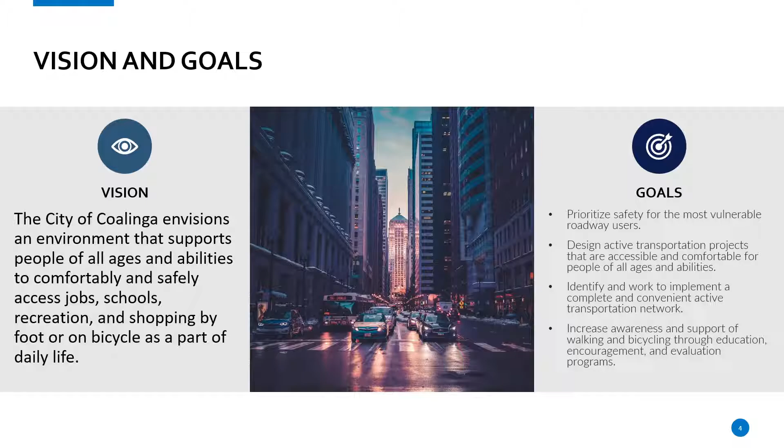In terms of prioritization criteria, this is where we start when developing grant applications and different projects to look at throughout the city. First, connectivity, a huge factor in a lot of our applications, in terms of connecting those areas where we have no sidewalk. That's what we're doing on this big active transportation project currently under construction around the schools and surrounding neighborhoods, where you're seeing a lot of installation of curb ramps and sidewalks.

Also safety, that's another big one. That's where you saw a lot of bulb-outs and other safety improvements we're doing along these corridors to enhance walkability. Ease of implementation - projects we can deliver quickly, not projects that take years and years. The challenge, like with our trail projects, is they take a little longer than putting in sidewalk, curb ramps, bulb-outs, or bike lanes.

Also a community identified need, based on whether the project is located in a challenging area as identified by the public, as well as the public input provided during development of the plan. These criteria are used to score projects and help determine how to best prioritize them, and these are the projects we look at through the Active Transportation Grant Program.

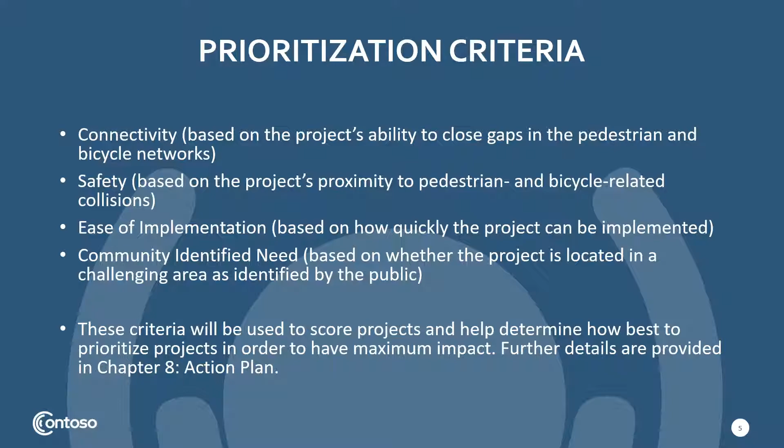This is an exhibit - the entire Active Transportation Plan is available on our website, but this is a large scale map of all the future improvements we've looked at from the comprehensive analysis done in the ATP. It includes crosswalk improvements, sidewalk improvements, school site improvements, spot improvements, curb ramps, curb extensions, pedestrian refuge islands, and additional signage.

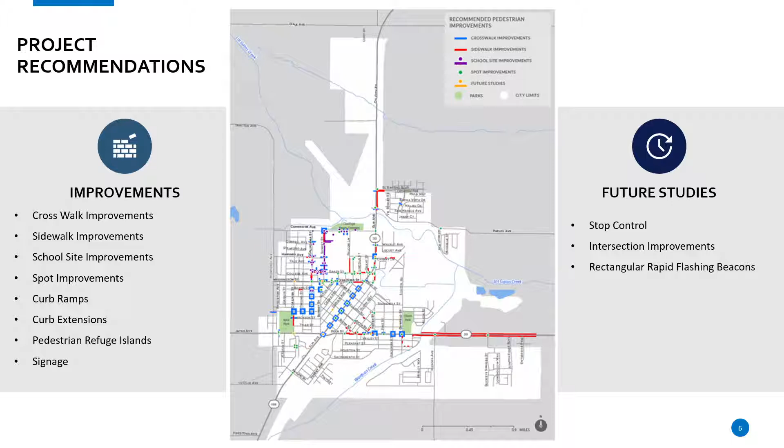We also have some future studies identified and looked at in the plan, where we examined stop control, intersection improvements, and RRFBs, our rectangular rapid flashing beacons.

So incorporated in this Active Transportation Plan is the ADA transition plan, which we completed in 2013. This basically looked at all of the sidewalks, the curb ramps, curb line, and bike lanes, in terms of ensuring that we have proper ADA accessibility throughout the town.

As you can see, 110, or 11%, of curb ramps were found to be in compliance with ADA requirements. Curb ramps were missing in 288, or 28%, of locations, and 624, or 61%, had existing curb ramps, but they weren't ADA compliant.

So when we look at prioritization, we're looking at areas that don't have curb ramps. That's why you're seeing a lot of areas right now west of the school, and then south of the school towards Keck Park, where we're placing a significant amount of curb ramps right now.

Like curb ramps, sidewalks were also evaluated in the ADA compliance plan in 2013, and 46,790 feet of sidewalks were found to be missing or non-compliant. So this has been a huge priority in terms of our future projects, to look at putting sidewalk where we don't have sidewalk. These have been established through the ATP and other projects eligible for this type of funding.

With this ADA transition plan, we will be doing another ADA transition plan in the near future, but we are going to wait until we finish our current ATP projects, so then we have an inventory to work off of and see where our successes have been since then.

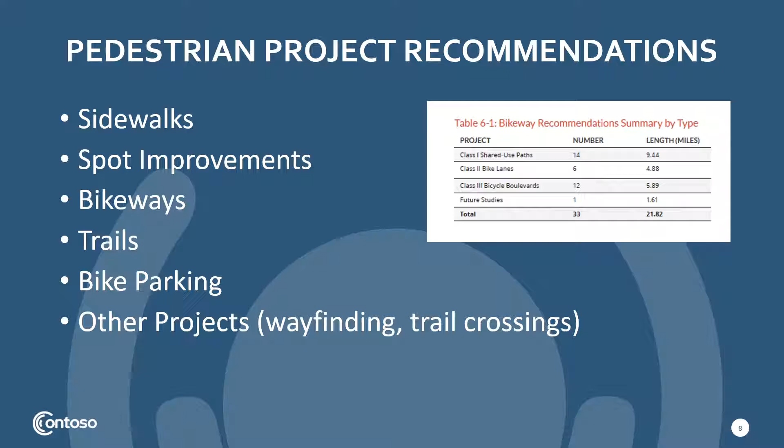In terms of recommendations that came out of the plan, we're looking at sidewalks, spot improvements, bikeways, trails, bike parking, and other types of projects like wayfinding and trail crossings.

In terms of pedestrian improvements, the spot improvements basically look at curb ramps and pedestrian refuge islands. Some future studies include crossings with RRFBs, certain hotspot intersection improvements, pathway crossings, which we look at when developing and designing the trail system, stop controls, and traffic calming measures.

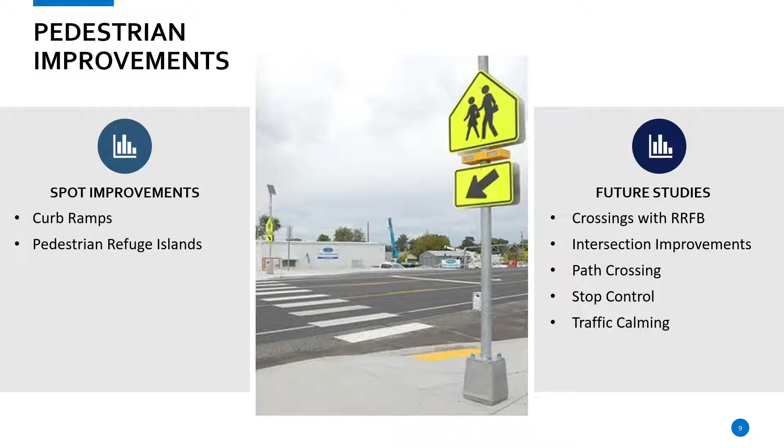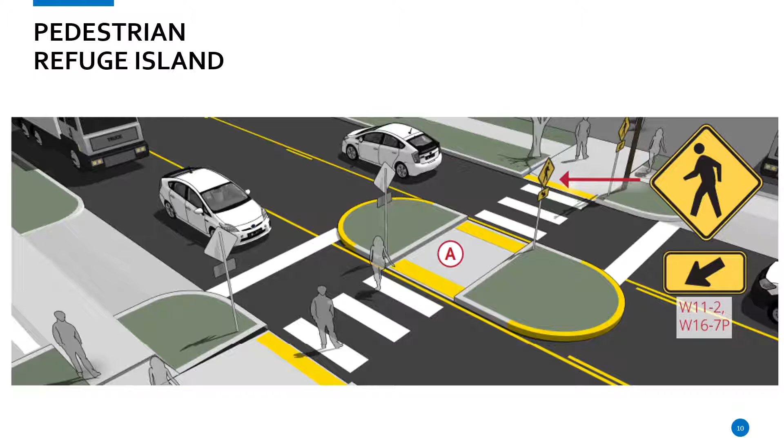So this is an example of a pedestrian refuge island. These are some types of improvements we'll see when the Complete Streets Elm Avenue project is completed in conjunction with Caltrans. Because of the large right-of-way width, the pedestrian refuge island allows you to safely cross half the roadway and then safely cross the second half.

In terms of bikeway projects, this gives you an idea of the different bikeway classifications: class 1, 2, and 3, and what those actually represent. The future studies for bikeways involve continuing to coordinate with Caltrans, since a lot of highway comes through the city, and making sure we're collaborating collectively on those projects.

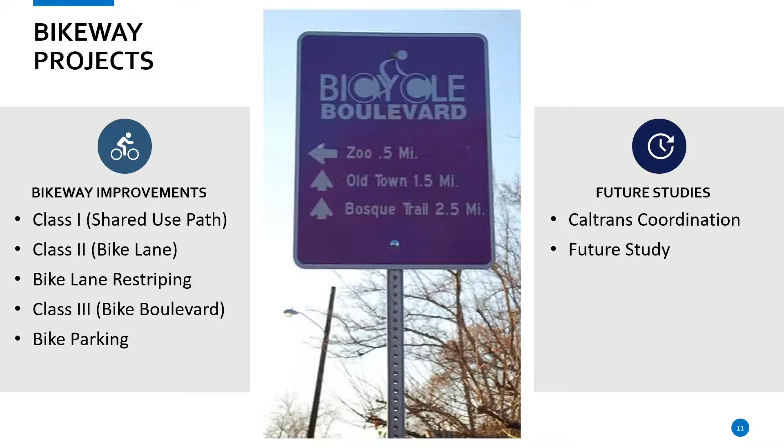Another big component of this active transportation plan was the development of a trails master plan. This was actually in development prior to my arrival, and we were able to finally implement it into a plan. Through grant funds, we've secured funding for almost half of the actual trail system. It will take some time due to CEQA requirements, the Environmental Quality Act requirements, and additional time for design and construction in some of these sensitive areas.

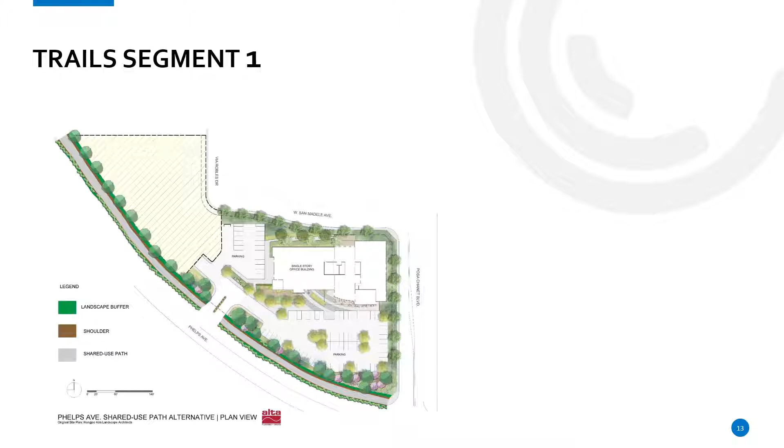So I think we have some examples of some of the trail segments. This is the trail segment already constructed in front of the new West Hills College District office. It typically has a shared use path with decomposed granite shoulders. We may not see landscaping in all of these locations, because landscaping requires significant maintenance and a lot of water use.

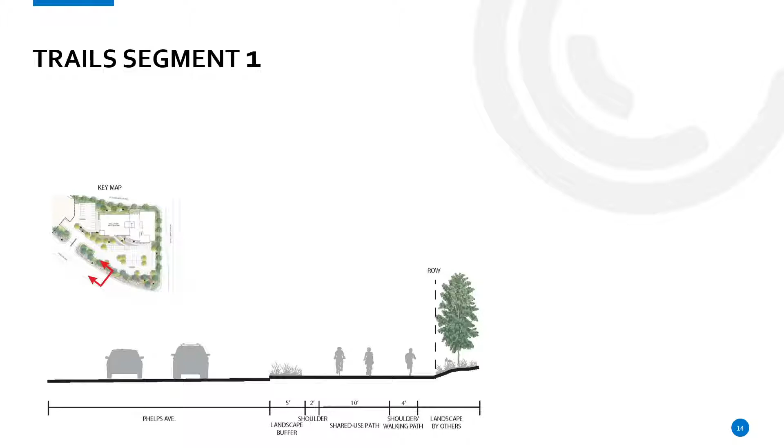So this is a cross section of how that path looks. This is pretty much what was implemented for the West Hills College area, but we will continue to look at costs as we go to different locations. It all depends on how much room we have in terms of right-of-way. This is an example of segment 5, so this is kind of what it would look like.

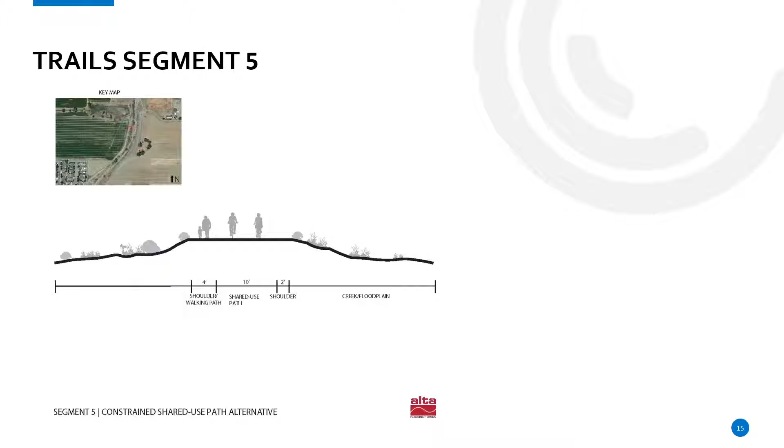I think this segment is somewhere near the walking beam, where it uses the contours of the environment to install a trail with a 10-foot shared use path with shoulder walking path, and a 2-foot shoulder on the other side. This is kind of a before and after of what it would create.

We have two segments that go through the CHRPD Sports Complex, segment 13 and 14. We've been in continuous conversation over the last few years with the Parks District about developing these segments, and you can see some examples in the master plan, a little bit bigger as well.

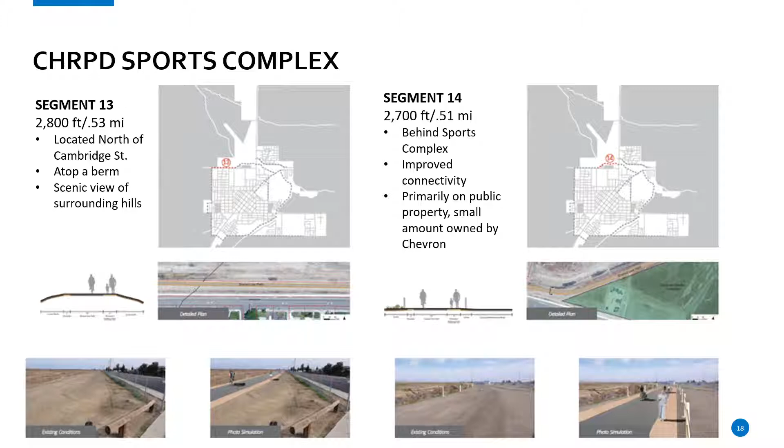So one of the big concepts is travel lane reconfiguration. There's a lot of considerations and benefits from a 4 to 3 conversion, what they call a 4-3 conversion, or complete streets, or a road diet. Typically these can handle traffic volumes up to 20,000.

Currently our record, what they call ADT, or average daily traffic, on Elm Avenue is about 10,600. That's stayed pretty stagnant over the years. I know this is the 2015 number, but it's still about right.

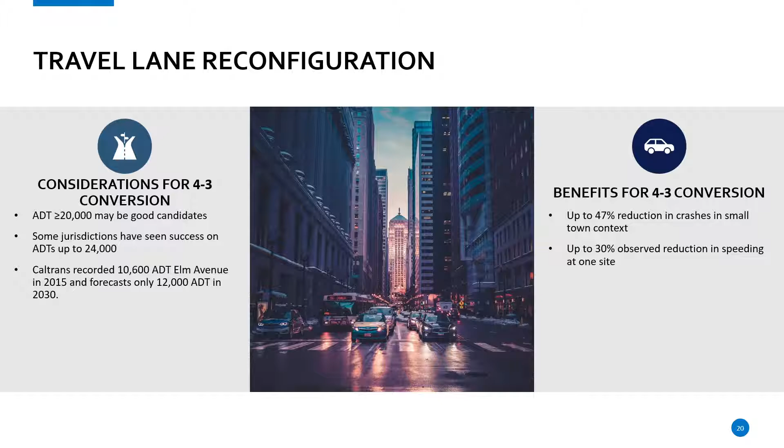A couple of the benefits we'll go into in more detail: up to 47% reduction in crashes in small town context, and up to 30% observed reduction in speeding, which is a huge impact and benefit to the road diet concept.

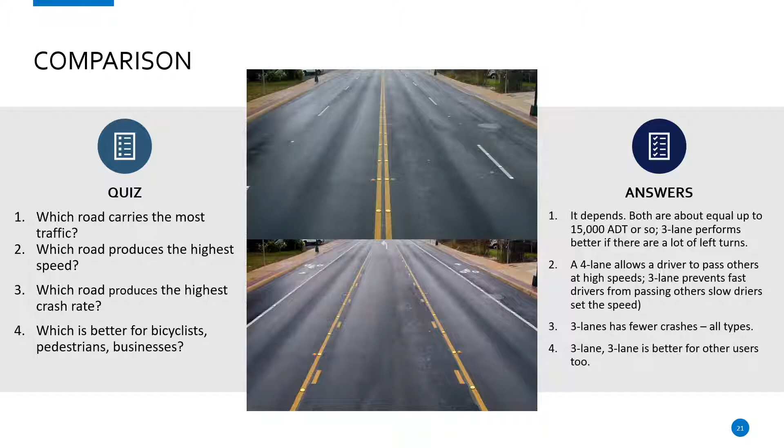So what it does is go from 4 lanes to 3 lanes, and there are questions related to which road carries more traffic, which relates to how much traffic these road diets can handle, which road produces the highest rate of speed, which road produces the highest crash rate, and which is better for bicyclists, pedestrians, and businesses. I think we know the answers to all of those.

It talks about some statistics regarding speed levels and the survival rate of a pedestrian accident. You can see the potential death rate of a pedestrian hit by a vehicle at certain speeds and how much it drastically drops as the speed drops.

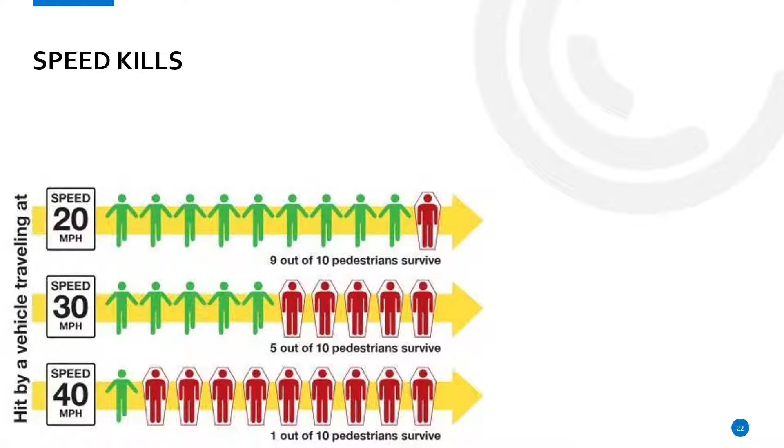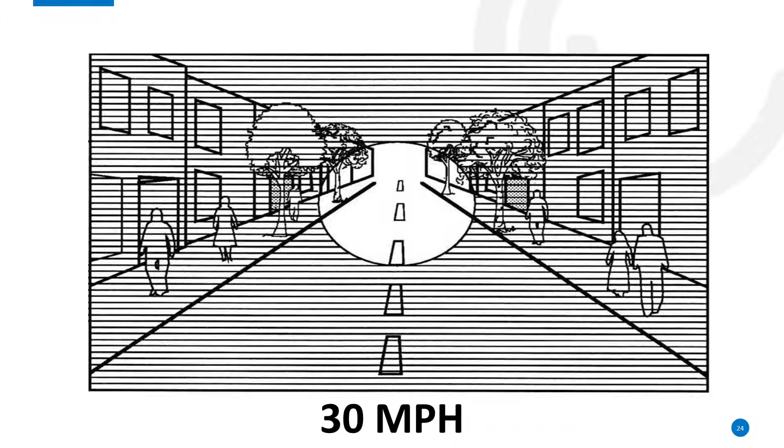This is another example of what you see at a certain miles per hour. A road diet and a reduction in lanes creates more of a sense of place, and you're actually able to see your environment better as you're driving. At 30 miles an hour, this is about what you can see, whereas currently people are driving between 35 and 40, and in certain instances faster, so that circle will be smaller.

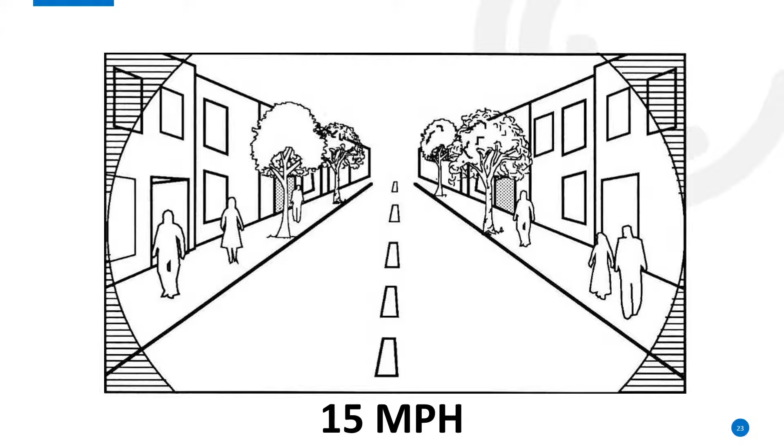These are a few examples of what occurs on 4 lanes compared to 3 lanes. I almost experienced one just yesterday pulling out because someone was passing someone else, and I'll show you that example. But it prevents and helps reduce rear-ends when people are turning and aren't paying attention and get hit.

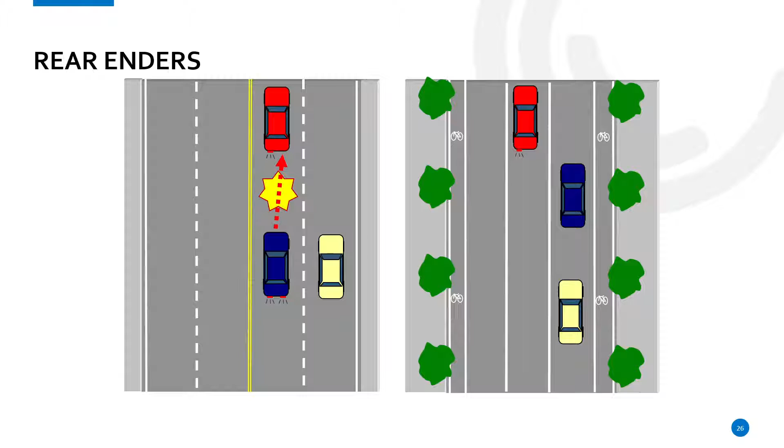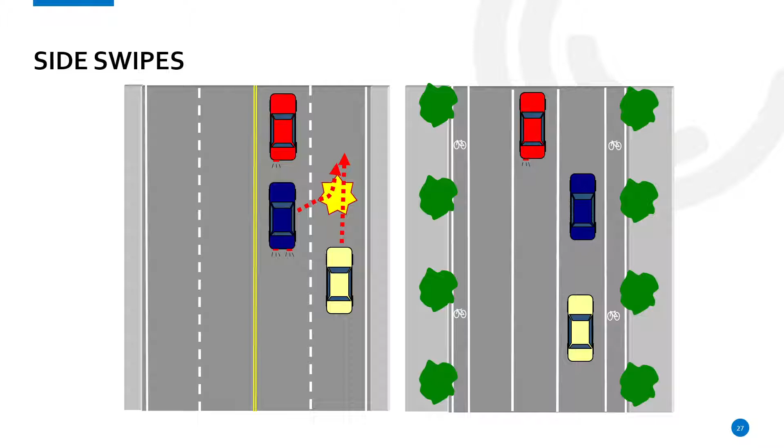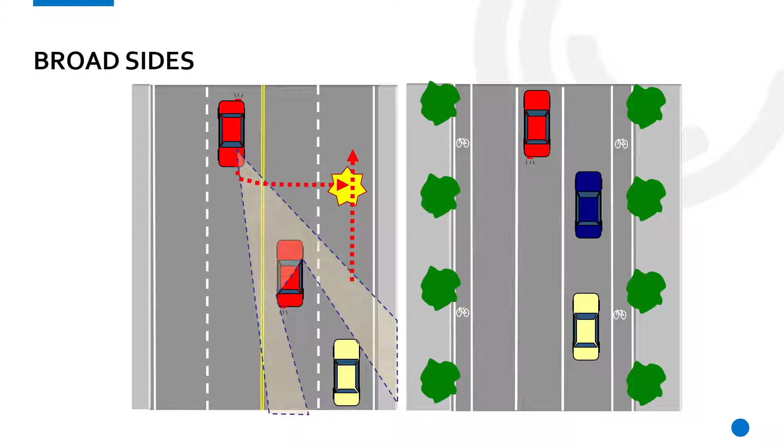In terms of the 3 lane, there's a center turn lane for people to get over when they're turning. Side swipes are the same - when someone gets over extremely quickly and hits that other person, but with the center turn lane folks turning can get in safely. And broadsides are instances where the person on the right doesn't see the vehicle turning left into the business, causing a collision in that lane.

So this is the existing configuration of Elm Avenue, which was provided as an example in the active transportation plan. However, this segment of Elm will be coming later, as 5th Street to the north is where the improvements are going to occur on Elm Avenue.

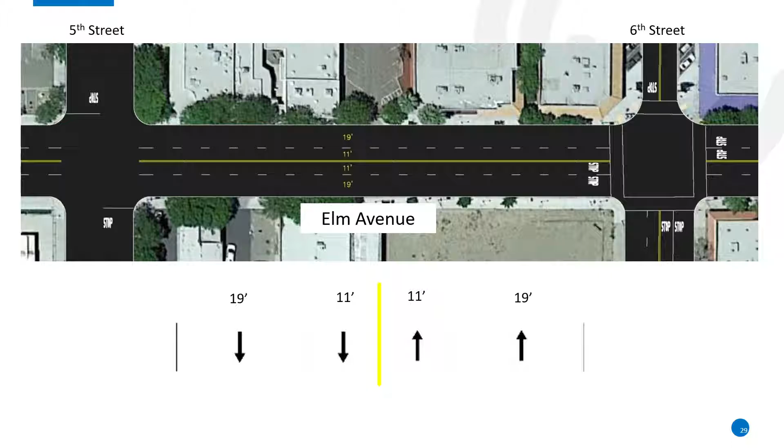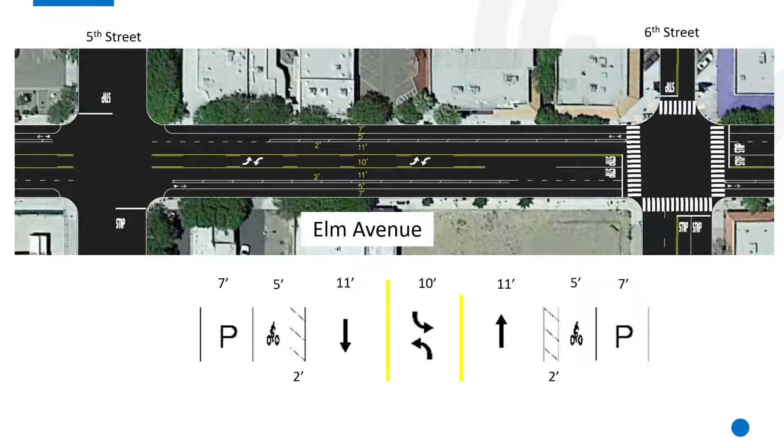Going from basically 4 lanes to 3 lanes, it provides a 7-foot parking strip with a 5-foot buffered bike lane, with an 11-foot, 10-foot, or two 11-foot travel lanes, a 10-foot center turn lane, and then the same on the other side with your bike lane, your parking, and your buffered lane between the bikes and vehicles. This gives you an example of what Elm is.

I think that's the old courthouse right there on the right, and what it would do to transform Elm Avenue once it's completed. A lot of this is striping. There are some other improvements that'll be included, but a lot of it is going to be a striping exercise.

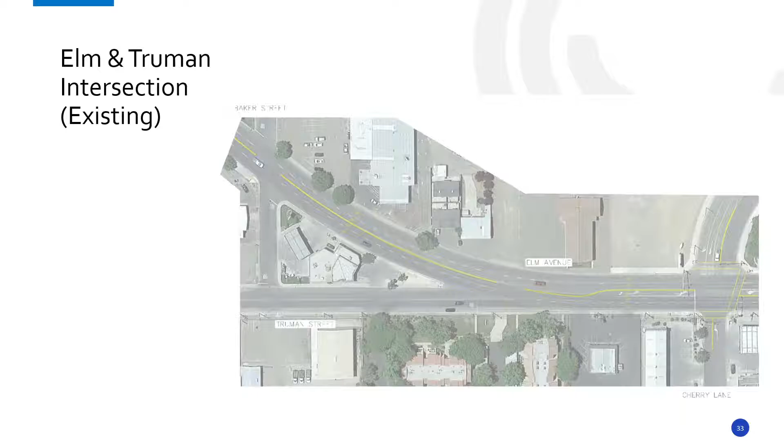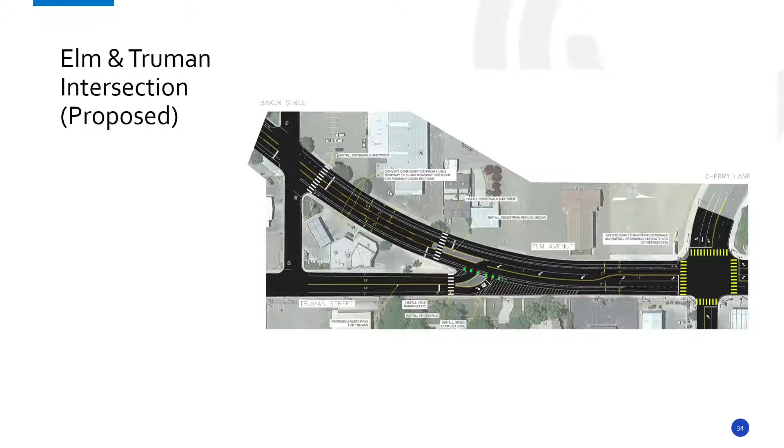This is the other Elm and Truman, which is existing, and these are some of the improvements that were implemented as part of the Forest and Truman project. Now you have that center turn lane with a dedicated turn lane for vehicles to make that left-hand turn and continue the flow of traffic down Elm Avenue.

So with that, that's what I have. Any questions you guys have? I got a couple questions.

The section that's right there in front of the theater, the bar, the old courthouse, is that like a test section that you guys are going to do first? No, that was actually where they did their concept, at least for the exhibit.

With Caltrans moving forward with their Complete Streets project, it's going to be from 5th to Cambridge on Elm Avenue. We'll be working with Caltrans for future funds to look at from 5th to Polk Street. We're going to be looking at completing that because it will go back to that 4-lane configuration there. But Caltrans' focus was Highway 33. And as we know, Highway 33 continues south right there on Elm Avenue when you pass 5th Street in front of the movie theater and the courthouse.

Another question. The trail, one of the pictures that you were showing, is that the dirt road that goes up to the railroad bridge? Is that getting fixed too on the trail system?

That is part of the trail system, but that is one area we will have to do a lot of analysis on before we submit for grant funds, because there's a lot of unknowns from a structural standpoint, and a lot of contingencies as to how we handle that, because it's on private property. So it's one of those things where the city would have to go through the right-of-way process under some type of federal grant fund.

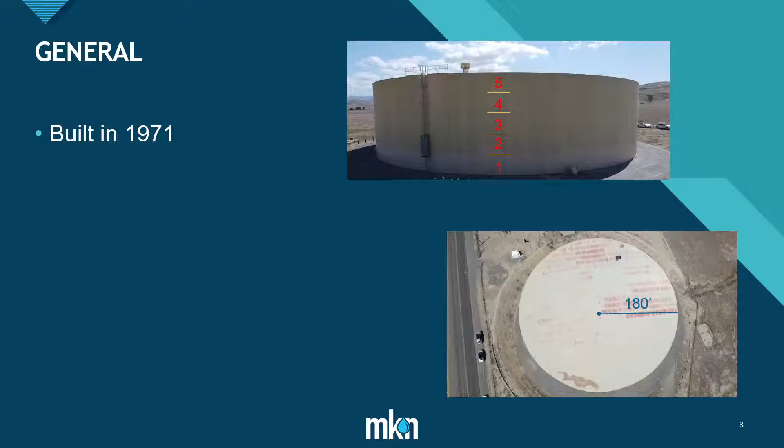So first off, just to give you a little background and context, the existing reservoir was built in 1971. So you can do some quick math, it's already 50 years old. During that time it was built as a welded steel tank, which is basically sheets of steel welded together. It's a pretty large tank - on the scale of water tanks, 7.5 million gallons is pretty significant, probably on the higher end of the spectrum for welded steel tanks. So we have that sitting out on the western end of the city.

As I mentioned, it's steel sheets that were welded together, basically 5 courses. We labeled the 5 courses, and if you go up closer to the tank you can see the seams. So it's 5 courses that are 8 foot tall each, creating a total height of a little over 40 feet, and it's a 180 foot diameter reservoir. I'm sure you've all seen it - it's a pretty significant facility sitting out there, and a lot of steel that over time corrodes and wears.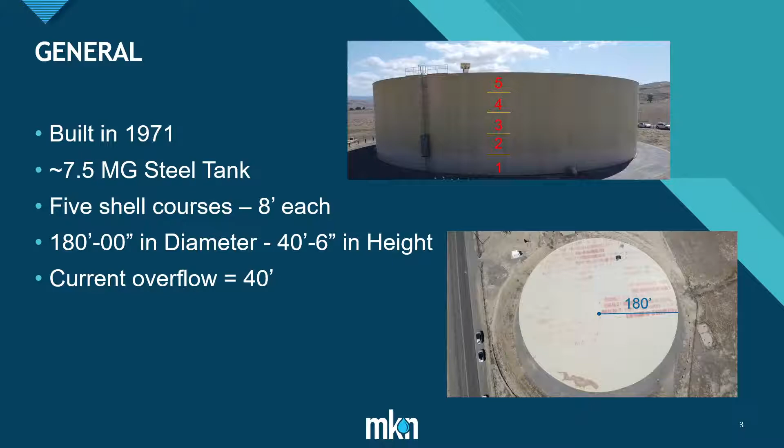The current overflow, which is basically the maximum water level that can rise in the tank, is 40 feet. Once it goes over 40 feet, the water will spill into an overflow pipe and be lost. I mention that because it's a really important number, and I'll come back to why later in this presentation.

So let's talk about some of the issues. We worked with a couple of our teaming partners - a structural engineering firm and also a coatings firm - to look at this tank in detail. A lot of the issues are really with the coating. The steel has basically experienced advanced corrosion. If you look at some of these actual pictures of the tank, you can see the coating has worn over time, which is natural, and once that happens the steel starts to corrode.

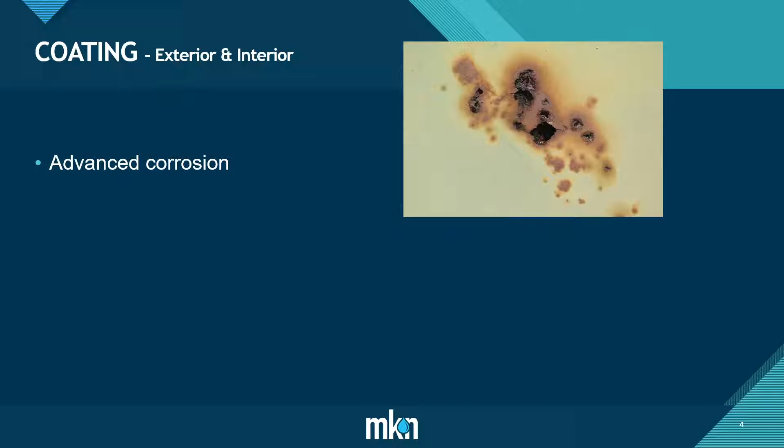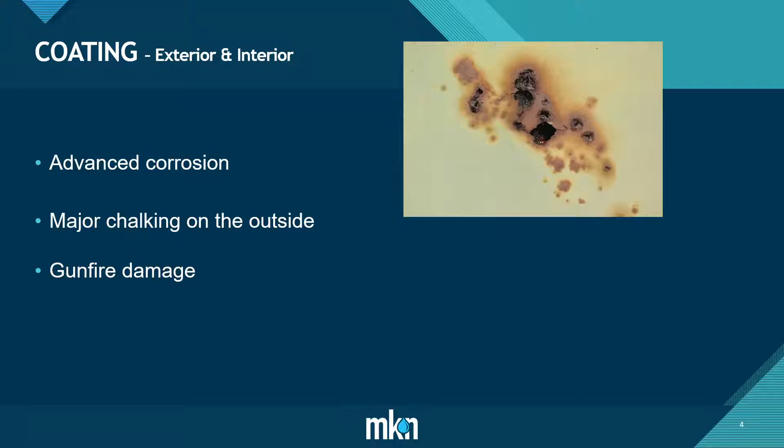There's a lot of areas where you see that. There's also major chalking - most of you have probably seen steel pipe or steel tanks, and over time that coating starts to chalk. It's not necessarily an issue that it's chalking, but it's a sign the coating is starting to age and fail. There's also gunfire damage - actual bullet dents on the tank. You can imagine it's a major target out there, and people have decided to fire at it over the years. But as far as we understand, that has never caused a leak or anything we know of.

Now, the biggest issue with the coatings is that it has high metal concentration. We grabbed samples of the coating and had that tested, and the testing showed the coating - which is 50 years old, or 30 years old whenever it was recoated - was from a time when there weren't as strict regulations, so the materials used contained heavy metal content, which today is not allowed. What that means is that to recoat the tank, we have to remove the existing coating, and there's a lot of other mitigation measures that have to be taken, like tenting the tank, similar to when you fumigate a house, just to protect the environment and the workers as they're working on the tank. So high metals was common back in the day, but those old coating systems are no longer allowed.

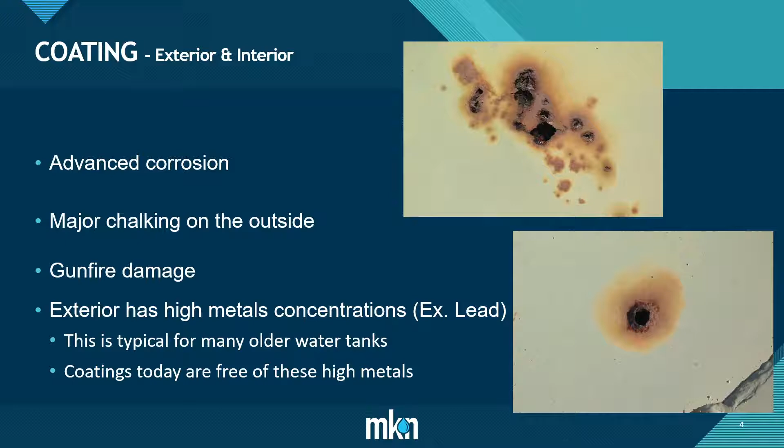So the other aspect that we looked at was structural and the appurtenances, which would be like the piping and valve connections. The structural is really the biggest issue.

The tank shell courses at their current operating level, which is about 35 feet, are overstressed. The reason is because this tank was designed in 1971, and seismic codes for tank designs didn't go into effect until 1978. The tank's still standing today, so it obviously was designed well, but from a design code standpoint, it does not meet today's seismic codes, which makes sense since it was designed 50 years ago.

I got a quick question for you. On you saying it doesn't meet current seismic codes, what's the wall thickness at the base versus the top? Is it tapered or all one? It's tapered. The bottom course is the thickest, and it reduces as you get higher.

Our report has the actual thicknesses, I just don't remember them offhand. Now some of the spots that are on the surface - that one was surface rust. The pitted ones, are they going to actually be removing it, or will they fill it in, patch it, and then coat it, or just recoat it?

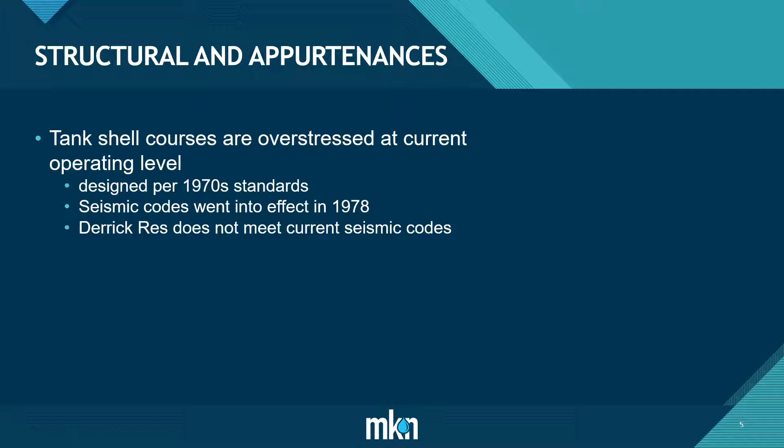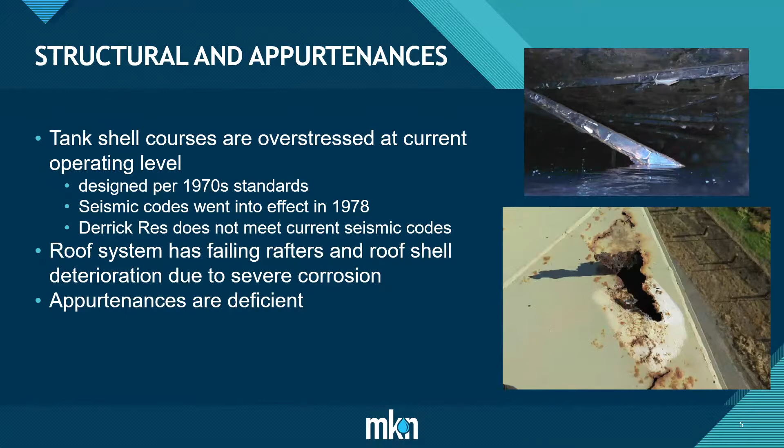So that tank, especially the roof, is the worst aspect of the reservoir. It's kind of dangerously deficient - that's the biggest issue. And the appurtenances are deficient as well. I'll talk about some of the reasons why later - I have a better slide to show why.

So here's what we recommend. First off, we looked at 5 alternatives. The first one is to basically keep the existing reservoir as is, not modifying its height or redoing its shell, but taking care of other improvements associated with replacing the roof, replacing some pipe connections, recoating, and reducing the water operating level. When I said the reservoir is deficient, that's when it's being operated at 35 feet. If that level can be reduced to 29 feet, then it would meet all the seismic criteria and not overstress the tank. That's alternative 1. Our report has a detailed summary of all those improvements, and it's basically a $3.2 million project.

Alternative 2 would be if the city really needs more storage - if we can't live with operating at 29 feet and need that 35 feet, that additional 6 feet of water. Then we would recommend retrofitting the lower 2 shell courses. There's a variety of ways to do it, and our report covers 3 different methods, but we would basically retrofit those lower 2 shell courses to strengthen them. Then we could operate the tank at a higher water level. That would include the same improvements as alternative 1 - coating, roof replacement, redoing the appurtenances - but also retrofitting the lower 2 shell courses, and that's a nearly $5 million project.

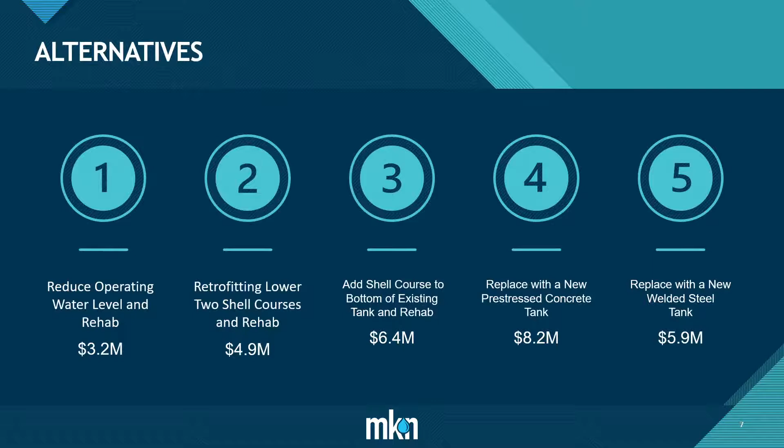So our recommendation is, well first off, for the first 3 recommendations, I've talked about those improvements we would want to do for all 3. One of them is the demolition and replacement of the existing roof, and in our research we found that installing a new aluminum roof would actually be the most cost effective.

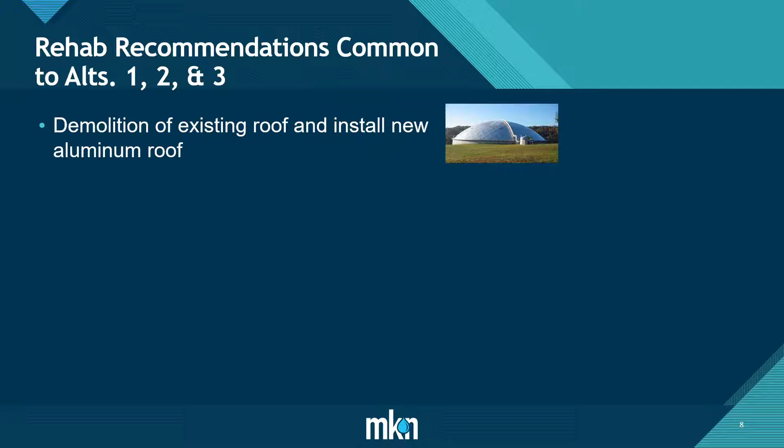There's a picture of an example aluminum roof and what it would look like, and you can see it has a much higher profile, more like a dome. If we were to go with the most economical aluminum roof, it would actually be about a 33-foot tall dome. The aluminum roof basically minimizes future maintenance because aluminum is a material that does not need to be coated, so we would not have to maintain the coating in the future.

Do you happen to know which type of aluminum? Because I know certain types of it are actually toxic—once water hits it and sits there for a long period of time, it becomes toxic. So are you going more towards the 70, 75, like aircraft grade? Is it good and strong enough to take any chemical, any water, any moisture, anything on it?

That's a good question. I don't know exactly the type, but I do know that the aluminum roof that's been used is a very widely used roof type for water tanks. So my guess is it's a non-issue, but I don't know the specifics of the aluminum. Is there any way you can find out the actual type, because there are 75 different types of it—everything from soft like butter all the way up to harder than steel? Yeah, we could definitely find out. We can definitely get that information.

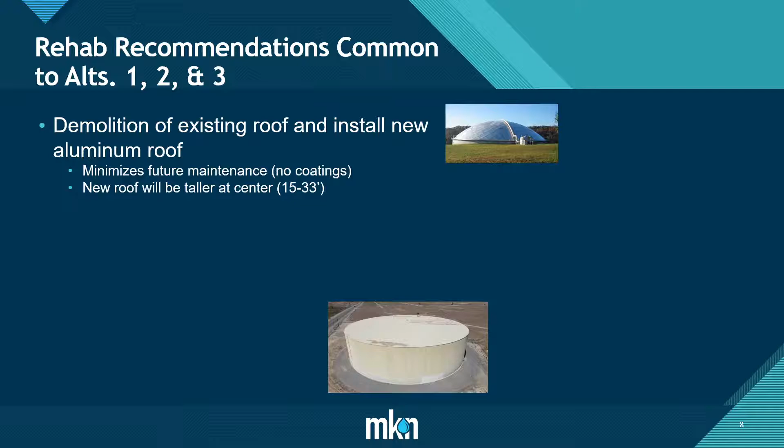Okay, so the roof profile would basically be, for the most economical option, 33 feet tall in the middle. You can imagine the existing Derrick Reservoir is 40 feet tall, and we're adding another 33 feet on top of it—that's kind of a worst case height. It could be minimized to possibly as low as 15 feet of additional roof height, but that would actually cost more. It sounds counterintuitive, but it would cost more because they'd have to make that roof stronger. When they can make it taller, they can utilize that dome structure features more and use less roof material to build it. So there are options that may cost more if the height was an issue, but it would still probably be the most economical roof type if we were to replace the roof.

We also have some safety upgrades that we recommend. This was kind of a smaller portion of those $1 million figures—new ladders, new current fall protection systems just for when divers or staff need to enter the tank for whatever reason. There are new protection systems available now.

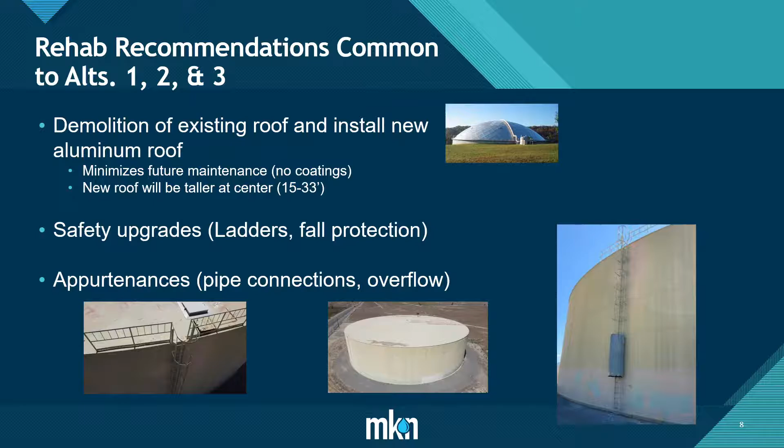And then there are also appurtenances that we recommend—pipe connections and the overflow, there are some improvements we'd recommend there. Relatively speaking, those are small cost figures. The big ticket items are really the roof and the coating, which make up about 80% of the total rehab costs.

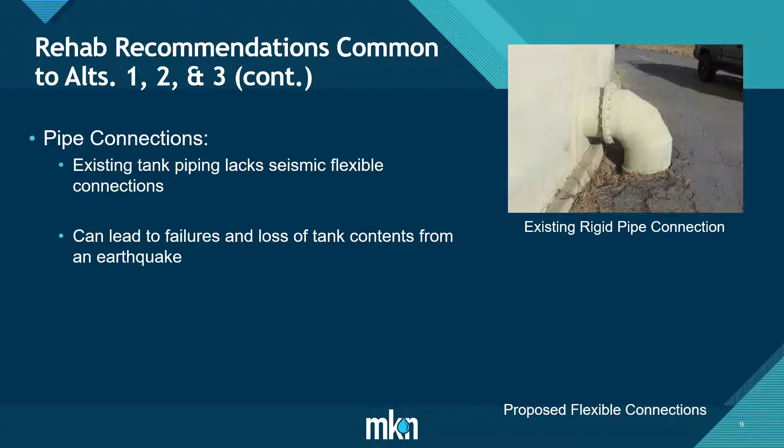So it was just a little more detail on the pipe connections. I don't want to get too technical, but basically the existing tank has these pipe connections that are very rigid. There's no flexibility to them at all, it's just pipe bolted onto the tank. So if there was an earthquake and significant deflection, that pipe is just going to shear off and crack, either the tank or the pipe. Obviously we don't want to see that happen. That would be a major repair needed and would take that reservoir out of service for a good amount of time.

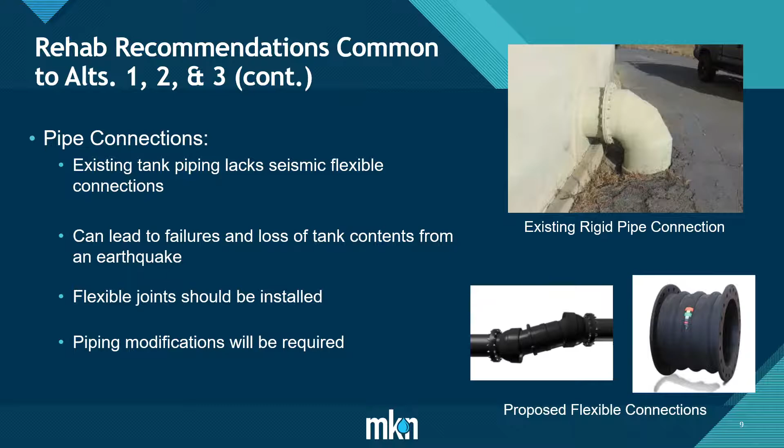What's the life of that with hard water? The life of those, probably past our lifetime. I mean most of that is all plastic and rubber material. Okay, yeah, so it's not going to wear. It's not going to rust or anything.

So we recommend, working with Sean and the water staff, alternative one, and here's a few reasons why. Obviously the lowest cost alternative by a lot - it was 3.2 million versus the others that were 4 or 5 million.

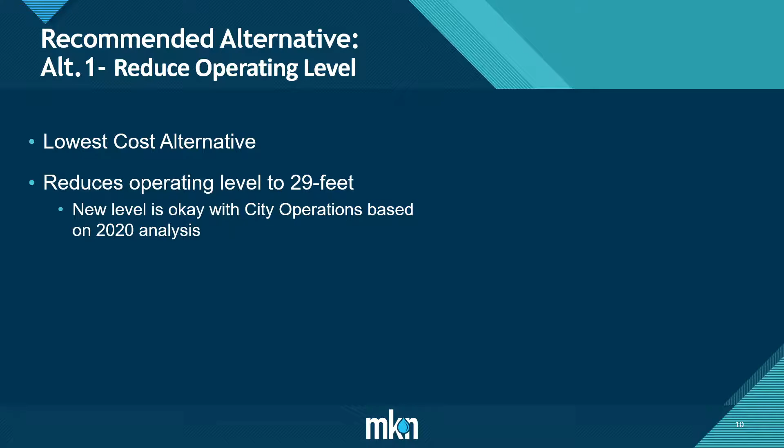One thing we would need to do is reduce the operating level down to 29 feet. But we've done some previous analysis on the system, looking at the city's storage, and we believe the city can live with 29 feet of storage, that volume would be adequate. That's one of the biggest reasons why we feel that would not be an issue.

And just visually showing you what that means, the water level would basically just drop down 6 feet.

The one thing we want to highlight is that we would keep the overflow at 35 feet. Right now it's at 40 feet. We recommend reducing that down to 35 because we feel it's unsafe to operate the reservoir above that. The reservoir is overstressed when the water level is above 29 feet.

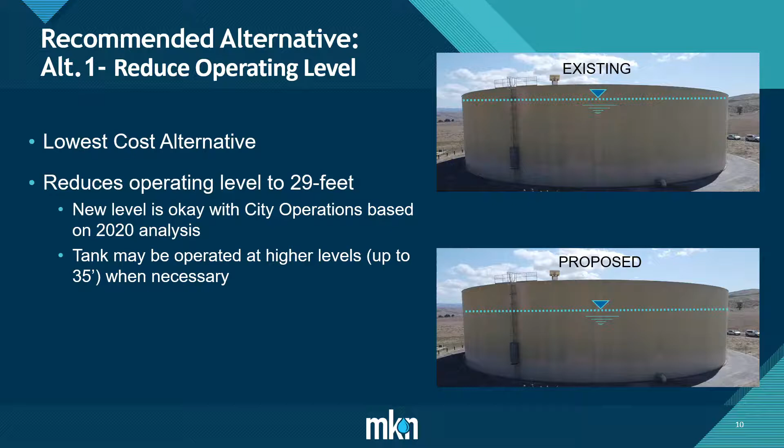But there's going to be times where you might be in a drastic drought situation - I'm sure there's been times close to that this year. And if the city decides the water is more important than the risk of the tank failing, the city can decide to take that risk and operate the reservoir higher to have more water on hand. You wouldn't operate above 29 feet all the time, when you don't need the water there's no point. But if there was an emergency situation where it was absolutely needed, then maybe for a short duration it's worth taking that risk just to ensure we don't run out of water.

Where does the overflow water go? I think there's an outlet that just discharges somewhere around the tank, I'm not exactly sure where. Just on the ground outside? Yeah.

And yeah, so by reducing the water level, it would alleviate the overstressing issue and also the tank freeboard issue, which is a requirement in water tanks.

I got a question for Sean real quick. If the water line goes down, that 6 foot that's not there anymore, how many days does that put us with water before we're out of water, with that extra 6 feet not there? Not very much. I don't think we rely on the storage tank for days of water. We're in a much bigger situation in terms of water shortage than just hoping we get water turned back on in, say, a day or two.

I don't know offhand exactly what that equates to, but we've had a lot of conversations back and forth about the water level, and this tank's been operating at 30 plus feet for 50 years. So basically at this point we're looking at current standards for the structural integrity of the tank and whether it can withstand it. It's shown that it can for 50 years, knock on wood, but we understand that we can operate at 29 feet. I know there's some circumstances as to why we've operated at higher levels, we don't necessarily need to go at those levels. But if we did have some type of emergency situation, we would be able to bring that water level up.

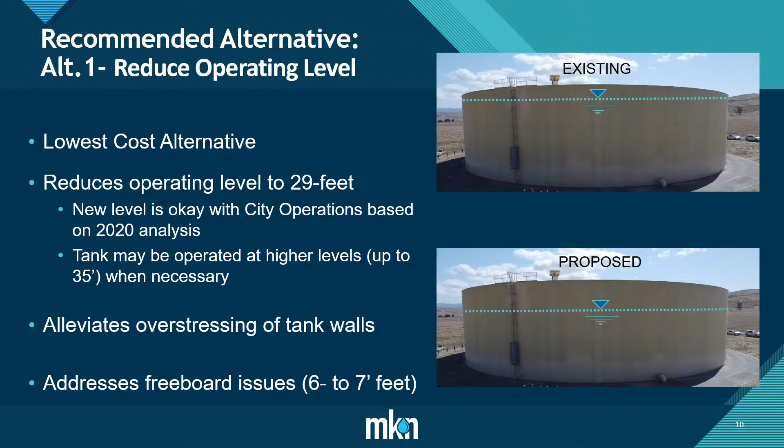Because it could take, we're talking 6 months, potentially 5 to 6 months for this tank to be down. So we really want to make sure that we're ready to handle the demands, continue conservation with the community, but also handle the demands and bypass.

Is that going to change as that's happening? Is that going to change the staff that needs to be on duty during those few months?

That's part of our contingency plans, and we've got a lot of planning ahead of us as we start developing our approach to having this tank down. So starting from pretty much now till we get this plan and the project going, we're going to continue planning our contingency approach and how we're going to staff and make sure we're monitoring it.

We're putting pressure regulators on a lot of these valves. We're actually looking at telemetry on these valves, which is basically the communication back to the plant, so we can see what the system's doing more than what we can see now.

Larry and some of the operators are working with some of the companies to look at what kind of telemetry we can have on some of these valves, to make sure we can communicate with bypasses, as well as making sure we know what the pressures are, what the flows are, to make sure that we're not having impacts in the city, and monitoring all different areas of town.